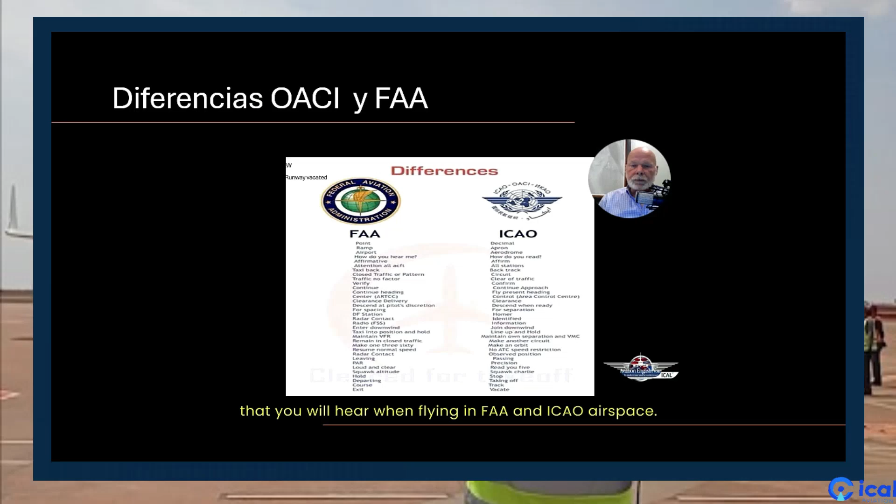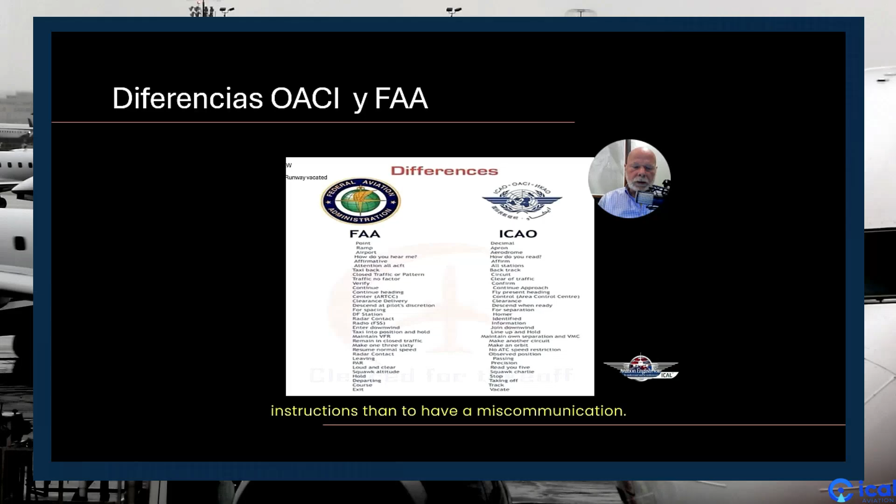This is a list of some of the differences in words you will hear when flying in FAA and ICAO airspace. It would be impossible to produce a complete list. No air traffic controller uses perfect phraseology. If you don't understand our last transmission, ask for clarification. We would much rather clarify our instructions than have a miscommunication. The more fluent you are in English, the easier it will be for you to understand a transmission if the phraseology is less than perfect.

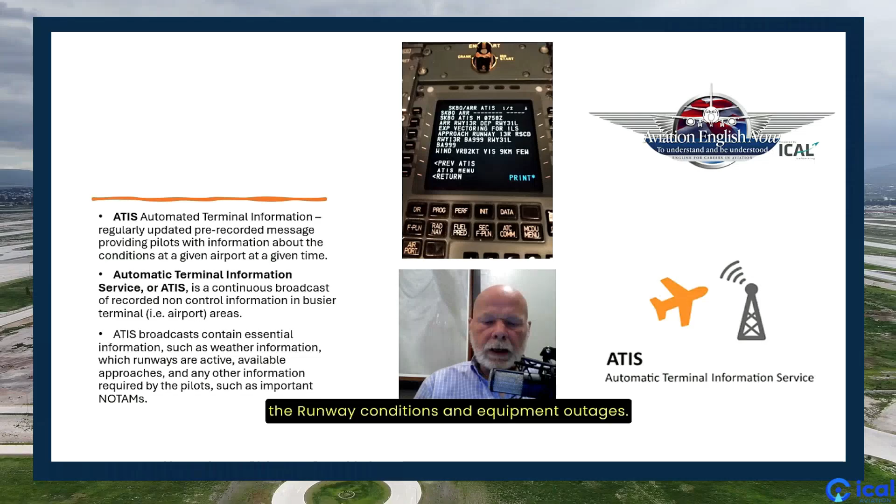The Automatic Terminal Information Service, or ATIS, is an efficient way for air traffic control to give pilots information about weather, airports, runways, and approaches in use. The ATIS will also contain information about runway conditions and equipment outages. At some airports this information is automatically generated, and instead of hearing a controller, you will hear a computer-generated voice. We call this a digital ATIS.

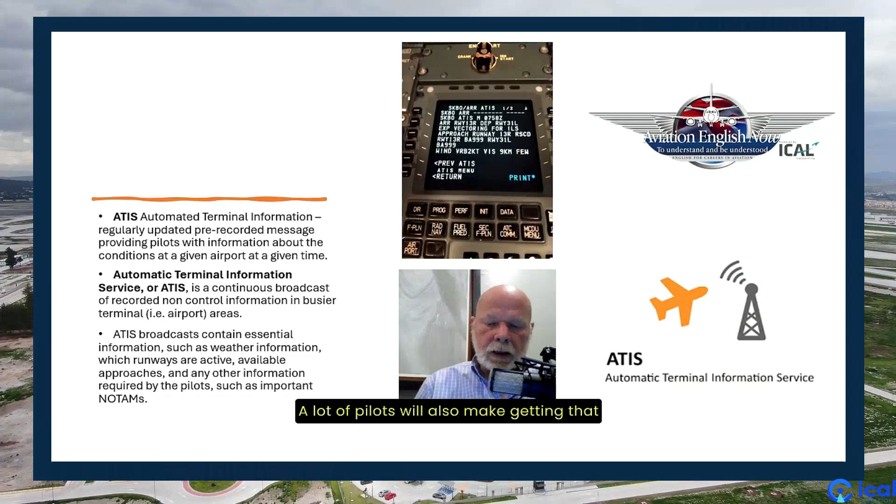The picture on the screen is what is available in the cockpit. If a digital ATIS is in use, some of you may be able to get a printout of it. A lot of pilots make getting that information part of their pre-departure habits, which makes planning departures just a little more predictable. The ATIS changes every hour, usually in the first 10 minutes or so, or more frequently if there is a pertinent change.

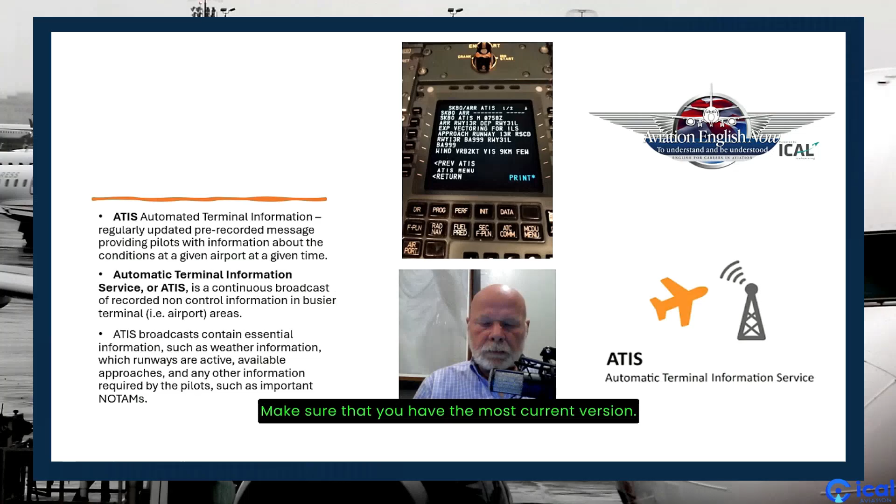The ATIS will change every hour, usually in the first 10 minutes of the hour, or more frequently if there are important changes. This happens when there is a change in the airport runway in use, or a significant change in visibility, etc. Make sure you have the most current version.

This is an example of the Miami ATIS. Listen to how much information is available.

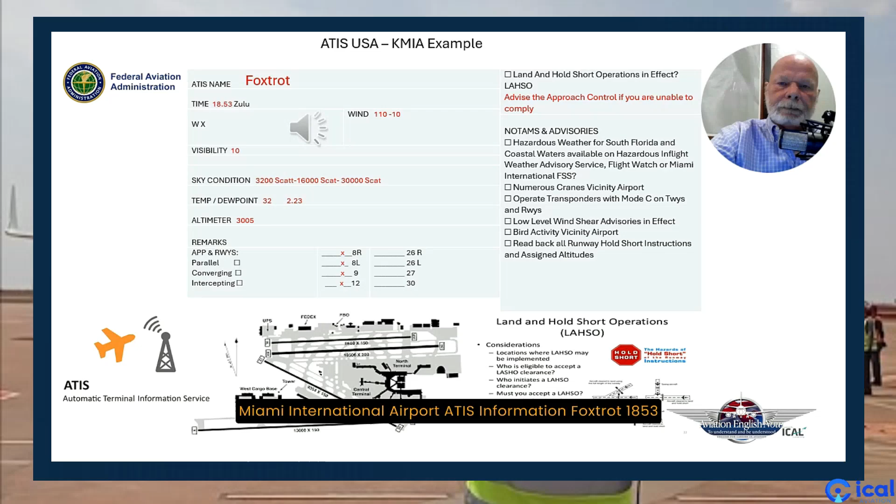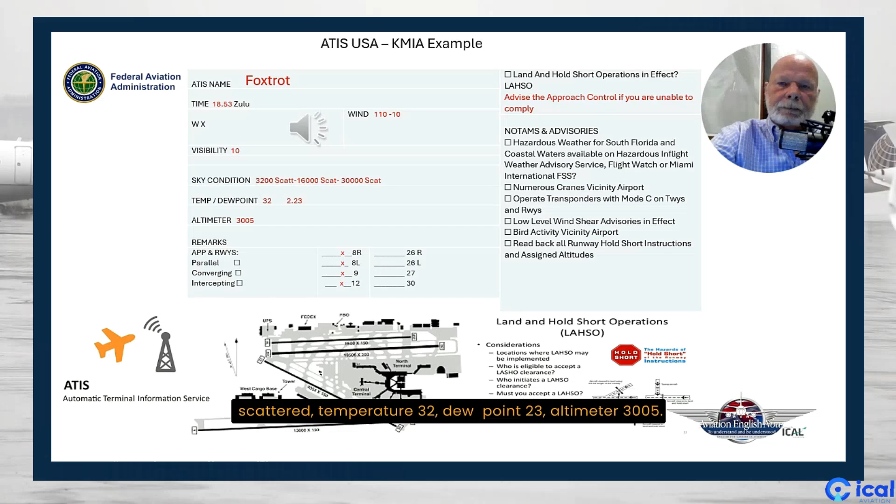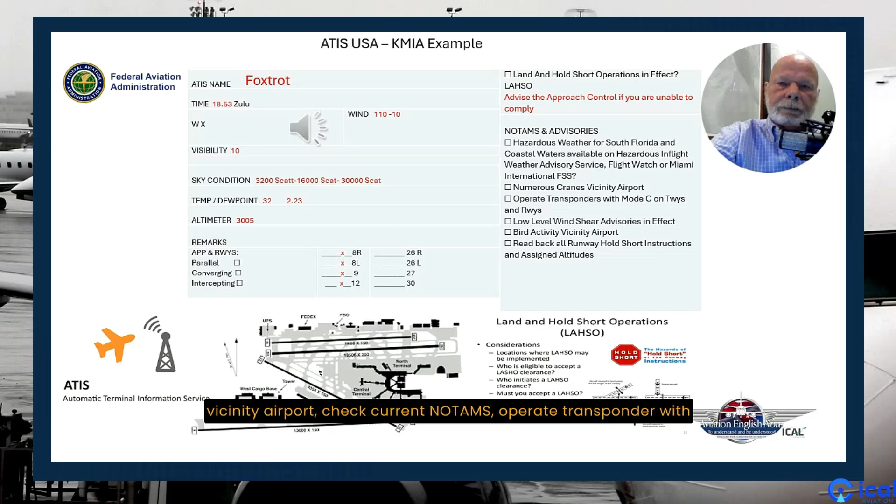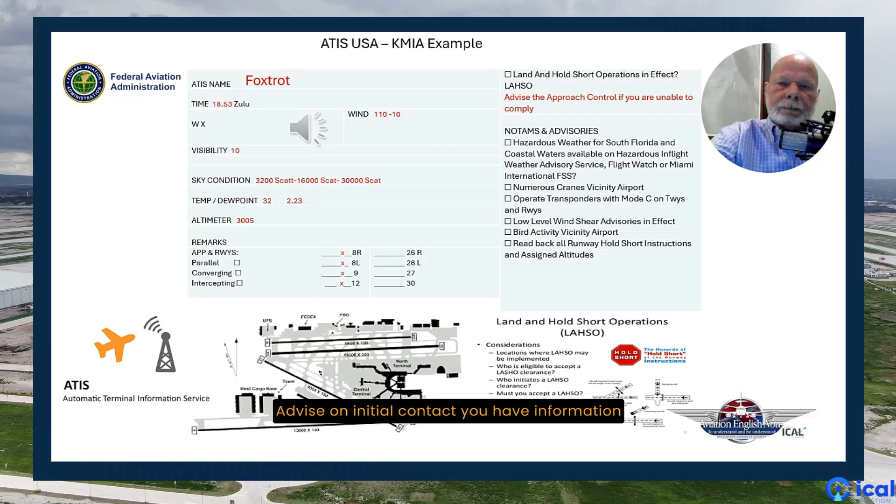Miami International Airport, ATIS Information Foxtrot, 1853 Zulu. Wind 110 at 10, visibility 10. 3,200 scattered, 16,000 scattered, 30,000 scattered. Temperature 32, dew point 23. Altimeter 3005. Approaches are being conducted to parallel, converging, and intersecting runways. Arrivals expect ILS runway 8 right, ILS runway 9, ILS runway 12, localizer DME runway 8 left, runway 12, runway 9. All aircraft landing runway 9 or runway 12 can expect to land and hold short. Notify Miami approach if unable. Notices to airmen: runway 9 MALSR out of service. Runway 8 right precision approach path indicator out of service. Dolphin VOR out of service. Numerous cranes vicinity airport, check current NOTAMs. Operate transponder with mode C on all taxiways and runways. Bird activity vicinity airport. Hazardous weather information for Miami area available from Miami Flight Watch, Miami Flight Service Station. All aircraft read back all hold short instructions and assigned altitude, advise on initial contact. You have information Foxtrot.

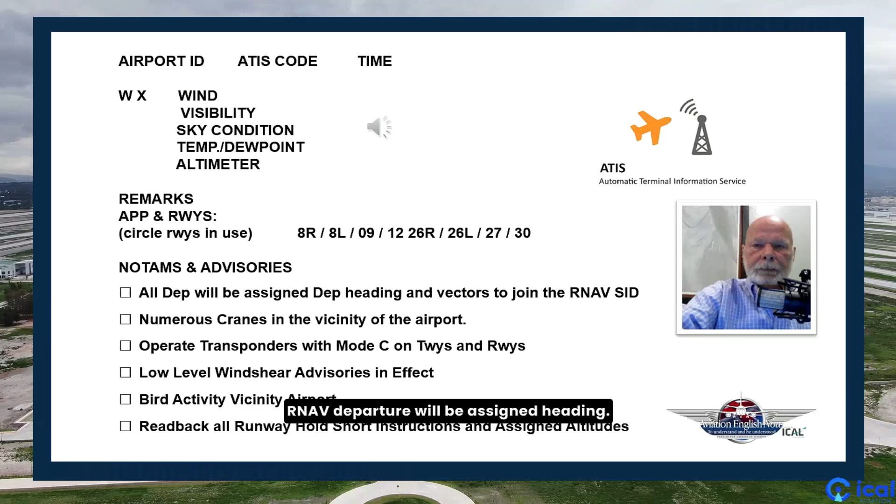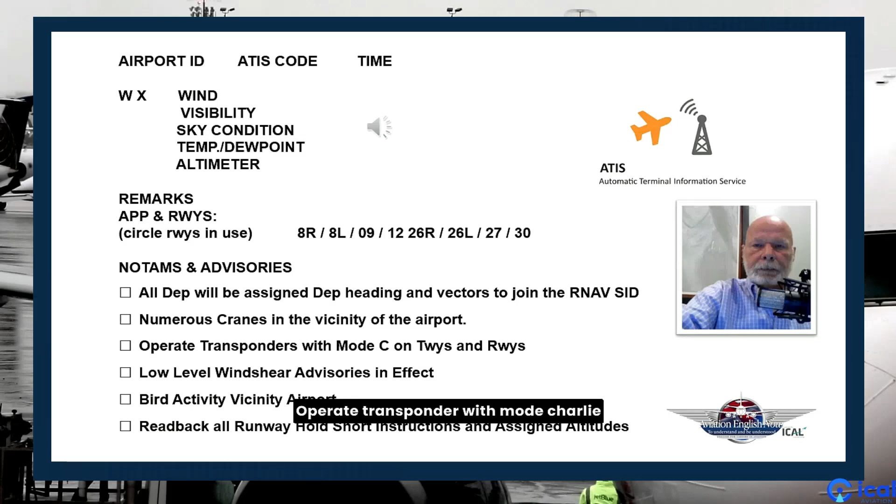Miami International Airport, ATIS Information X-ray, 2153 Zulu. Wind 120 at 13, visibility 10. Few clouds at 3,000. 4,800 broken, 25,000 broken. Temperature 26, dew point 20. Altimeter 3005. Departing runways 8 left, 8 right, 9, 12. RNAV departure will be assigned heading. Approaches are being conducted to parallel, converging, and intersecting runways. Arrivals expect ILS runway 8 right, ILS runway 9, ILS runway 12, RNAV GPS runway 8 left, runway 12, runway 9. Aircraft landing runway 9 or runway 12 can expect to hold short. Notify approach if unable. Notices to airmen: runway 9 MALSR out of service. PHK VOR out of service. Numerous cranes vicinity airport, check current NOTAMs. Operate transponder with mode Charlie on taxiways and runways. Bird activity vicinity airport. Hazardous weather information for Miami area available from Flight Watch, Miami Flight Service Station. All aircraft read back all hold short instructions and assigned altitude. CPDLC DCL service operational, advise on initial contact. You have information X-ray.

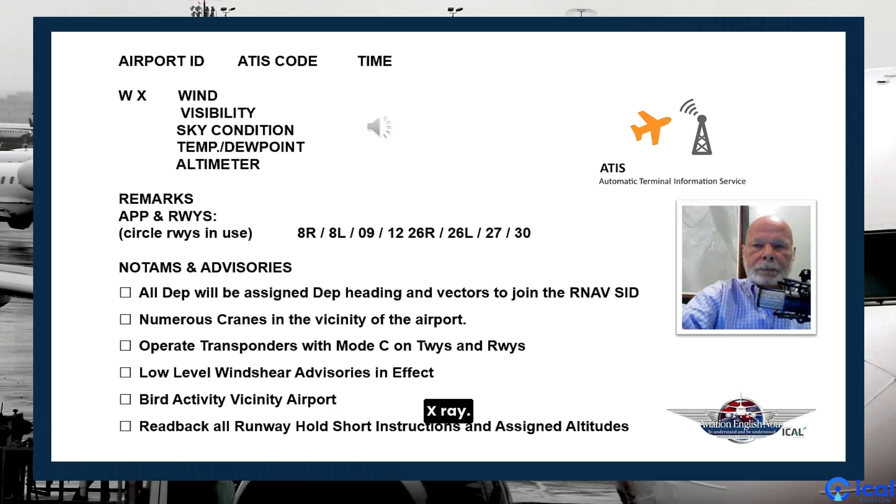We'll have both an arrival and departure ATIS.

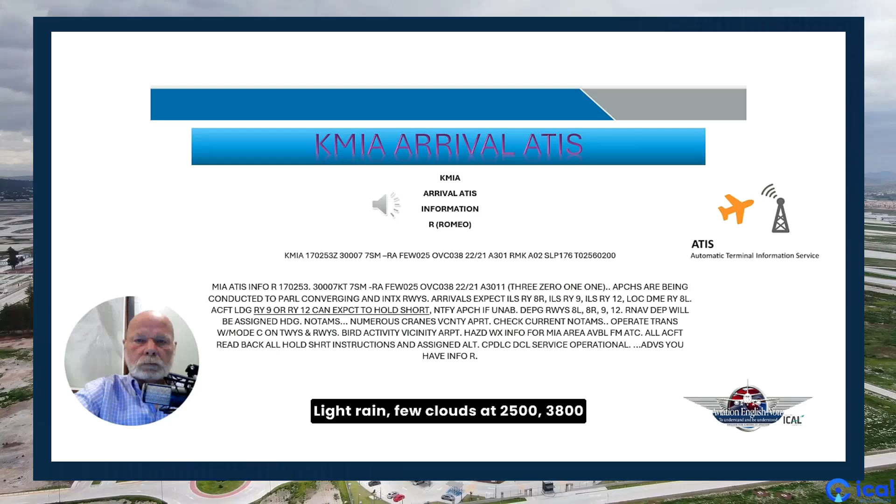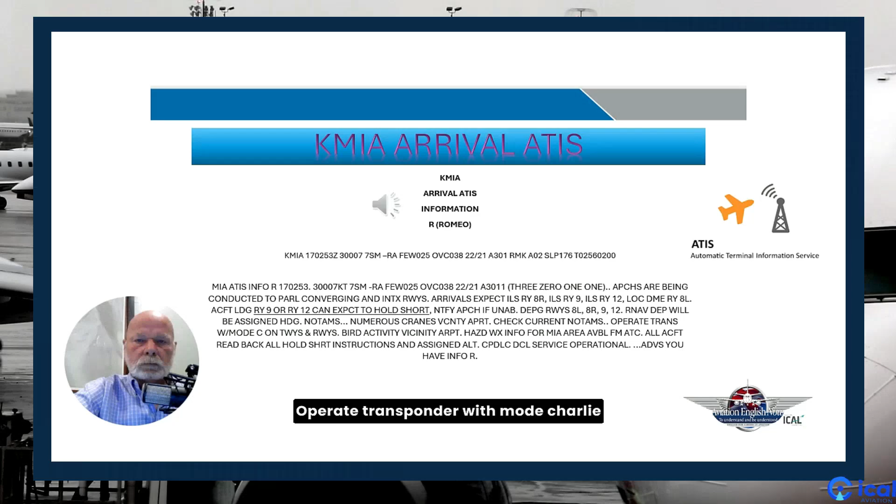Miami International Airport, ATIS Information Romeo, 0253 Zulu. Wind 300 at 7, visibility 7, light rain, few clouds at 2,500. 3,800 overcast. Temperature 22, dew point 21. Altimeter 3011. Approaches are being conducted to parallel, converging, and intersecting runways. Arrivals expect ILS runway 8 right, ILS runway 9, ILS runway 12, localizer DME runway 8 left. Aircraft landing runway 9 or runway 12 can expect to hold short. Notify approach if unable. Departing runways 8 left, 8 right, 9, 12. RNAV departure will be assigned heading. Notices to airmen: numerous cranes vicinity airport, check current NOTAMs. Operate transponder with mode Charlie on taxiways and runways. Bird activity vicinity airport. Hazardous weather information for Miami area available from ATC. All aircraft read back all hold short instructions and assigned altitude. CPDLC DCL service operational, advise on initial contact. You have information Romeo.

When you call clearance delivery to get your clearance, the only thing I need to hear is your identification, what your destination is, whether you have the current ATIS, and what gate or parking spot you are coming from.

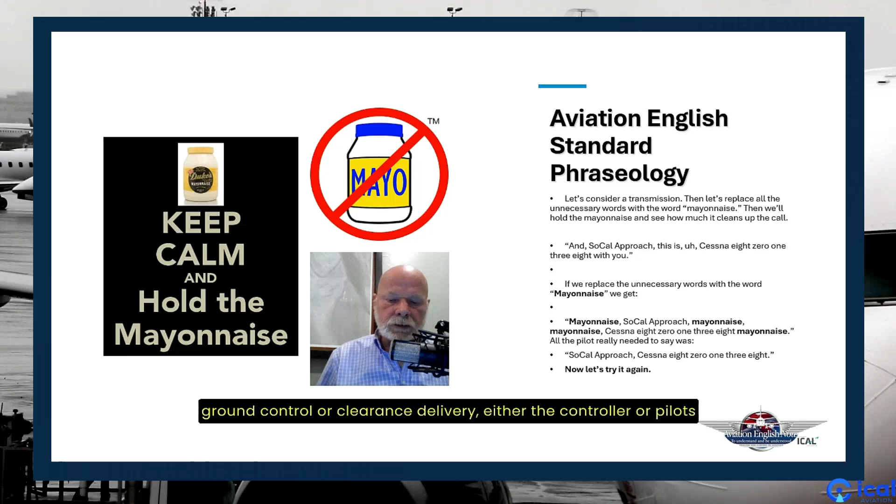I know I use this phrase a lot, but the key to communication is clear and concise. In busy airspace, ground control or clearance delivery, either the controller or pilots will be taking up almost all available radio time. There simply isn't time for unnecessary verbiage.

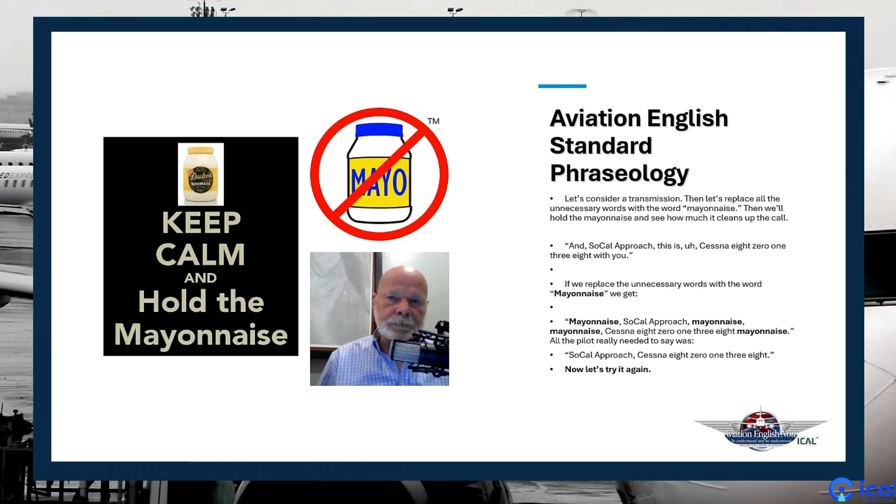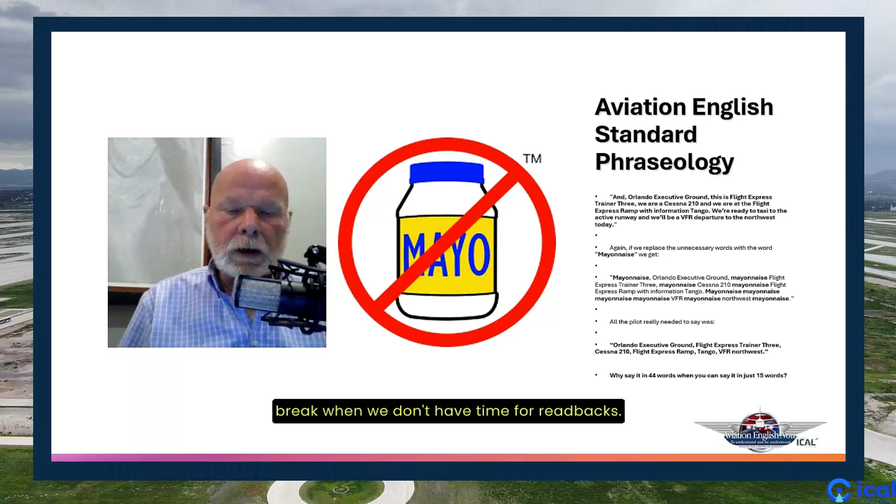Remember in Module 1 when we talked about how controllers will handle the frequency by using the word 'break' when we don't have time for readbacks? Now imagine the problems it causes when a pilot checks in with the phraseology in the previous examples. And yes, it happens a lot.

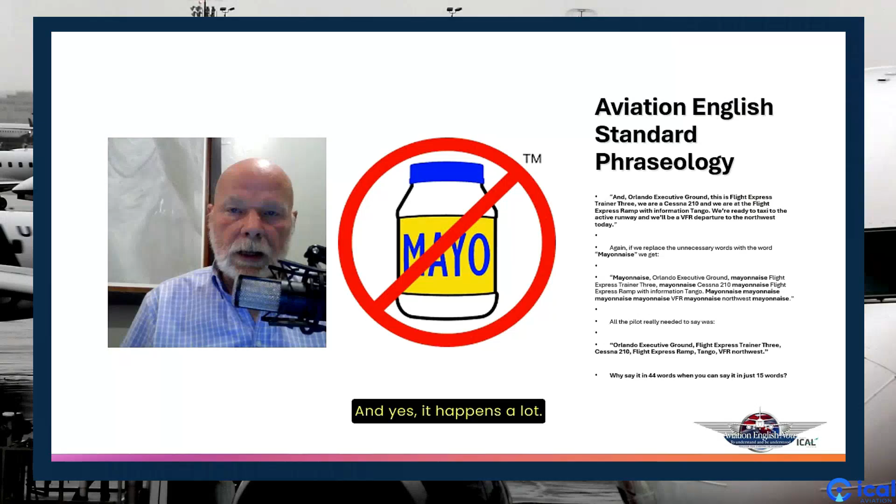You may wish to include a greeting. Sometimes it may be good morning, good afternoon, or good evening. Some of you may wish to substitute that with Happy Thanksgiving, Happy New Year, or Happy Holidays. If we aren't busy, it's nice to hear. If it's a holiday celebrated in your country but not in ours, let us know—maybe it's the 7th day of September.